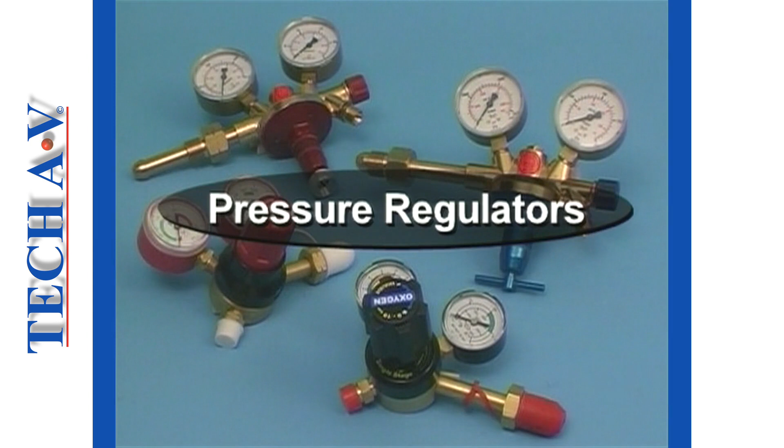The producers of Tech AV Learning Aids welcome you to this series on the subject of portable oxyacetylene downstream equipment. This program deals with the pressure regulators associated with oxyacetylene equipment.

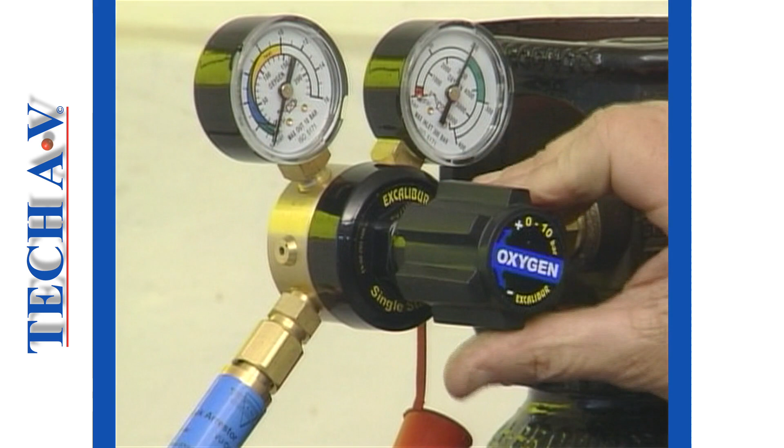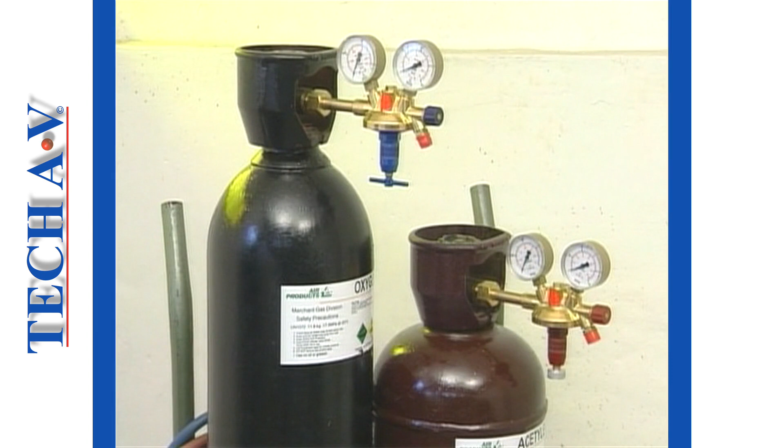Pressure regulators are essential devices in all high-pressure gas applications, and it is highly recommended that, for safety, you use only those regulators equipped with 2 pressure gauges. The primary function of a pressure regulator is to reduce cylinder discharge pressure to a safe, practical, and steady outlet or working pressure.

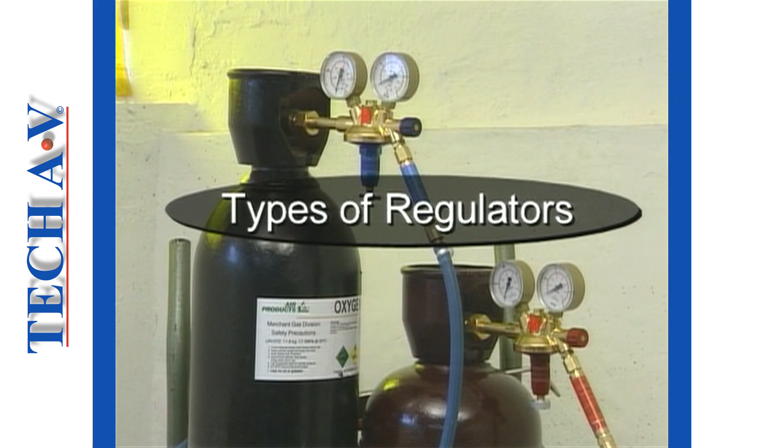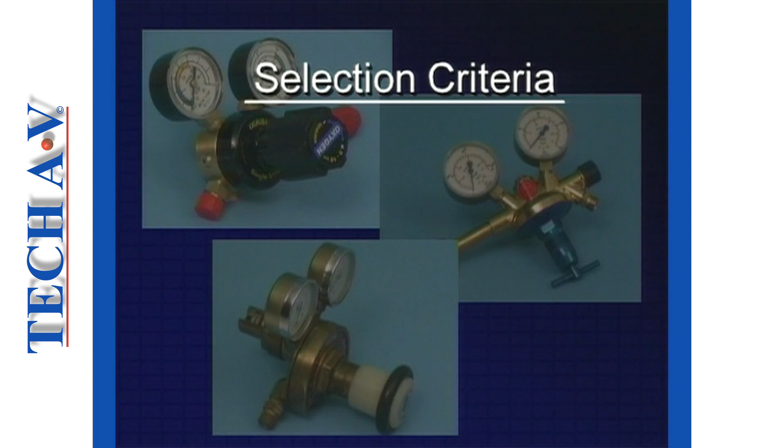There are essentially 3 types of regulator that can be used with oxyacetylene cylinders, namely single-stage, single-stage pressure compensated, and dual or multi-stage regulators. Regardless of which of these 3 types you use, when selecting a regulator, you need to be aware of some important safety considerations. These include manufacturing standards, gas type, cylinder pressure or inlet pressure, and working pressure or outlet pressure.

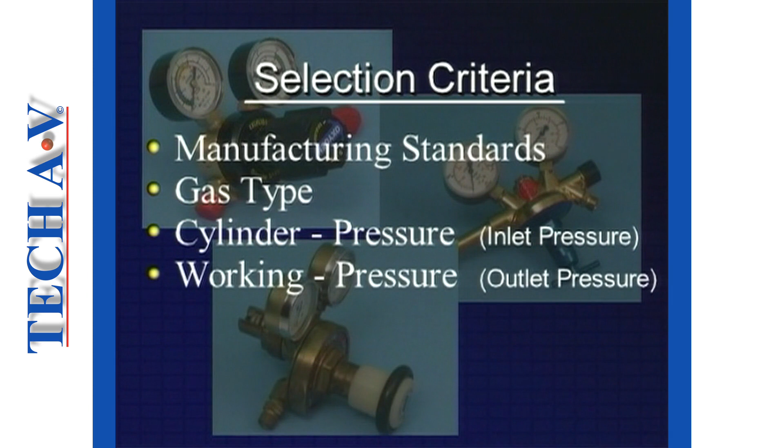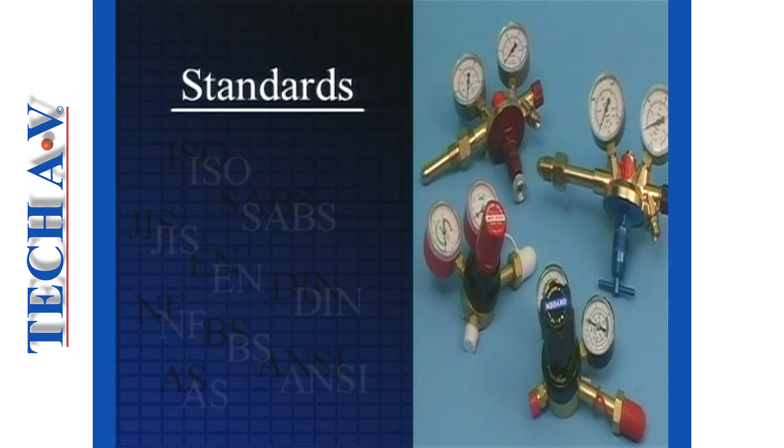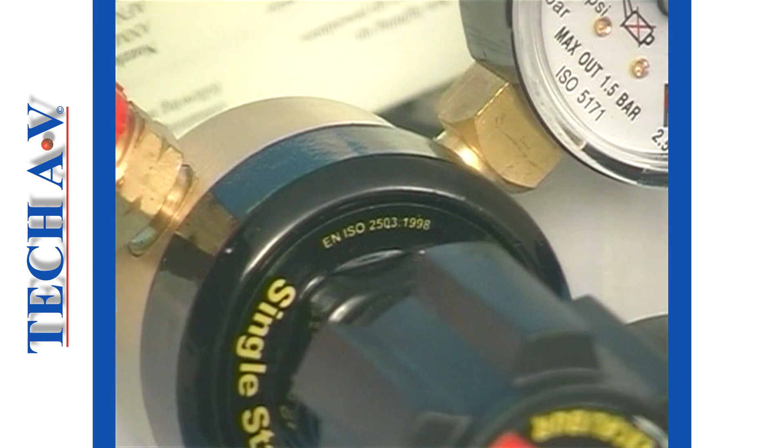The first consideration when selecting a regulator is the manufacturer's standard. Make sure the regulator you use or buy meets ISO 2503 standards or your local equivalent. The ISO 2503 rating will confirm that the device meets with international safety standards of manufacture. You should be able to locate evidence of the manufacturing standard either stamped into the regulator's body, on a specification decal, or in the printed specifications of the regulator.

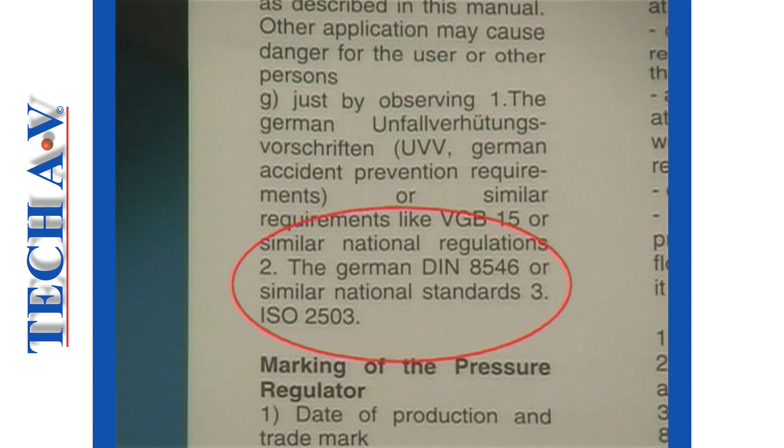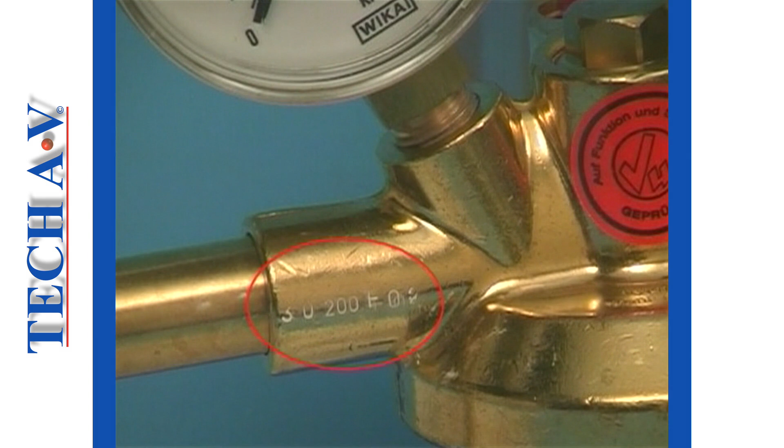One should also consider the date of manufacture or the expiry date, which all leading manufacturers will offer in one form or another. According to most codes of practice, regulators that are designed for use with oxyacetylene and are over 5 years old should be replaced. The next consideration is gas type.

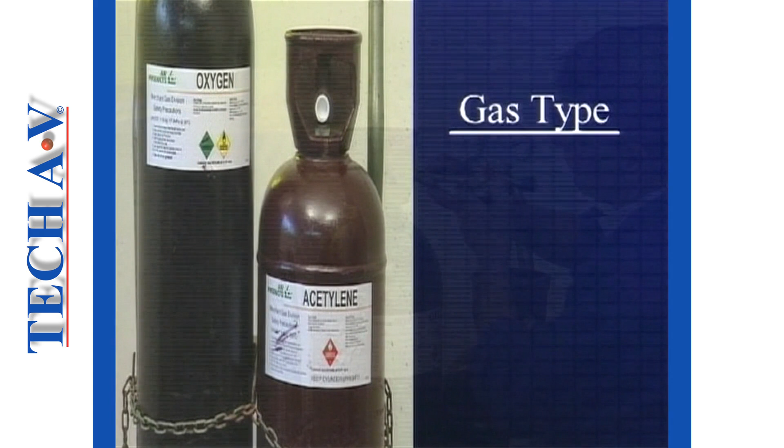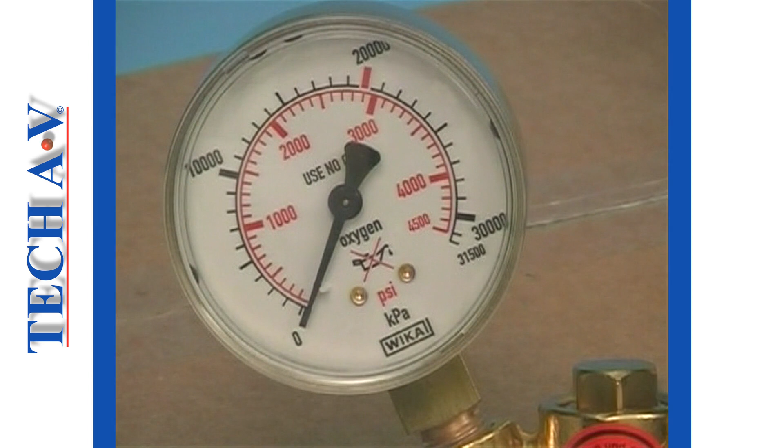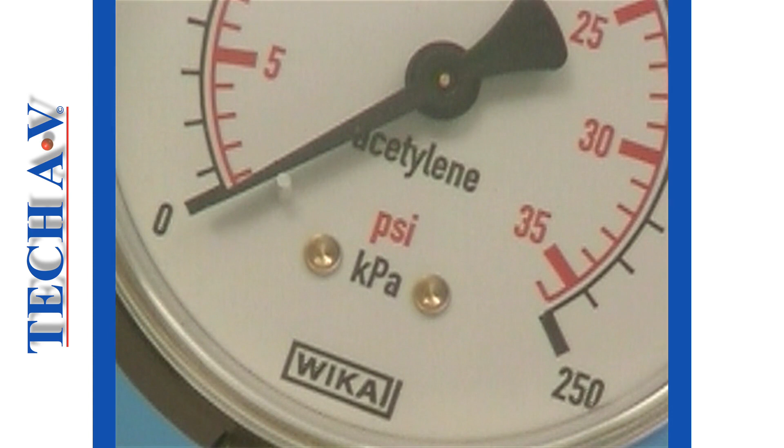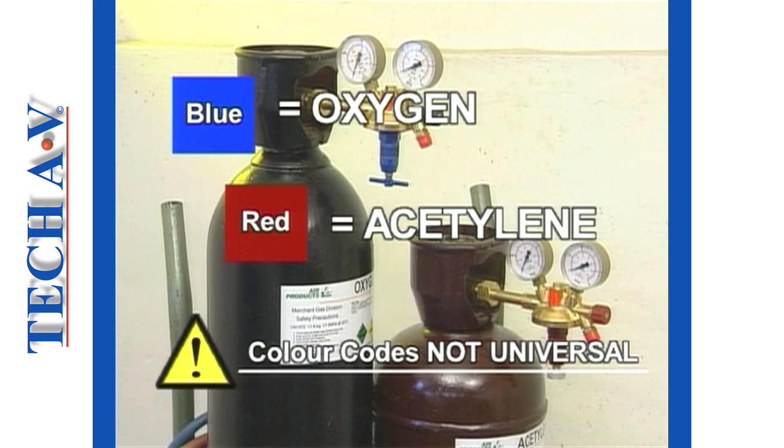An oxygen cylinder must be fitted only with an oxygen regulator. The word oxygen should be clearly displayed on the device and upon the gauges. Likewise, an acetylene cylinder must be fitted only with a regulator that clearly states that it is an acetylene regulator. Although the colors blue for oxygen and red for acetylene are commonly used, one must never rely upon this as positive identification, as color codes are not universal.

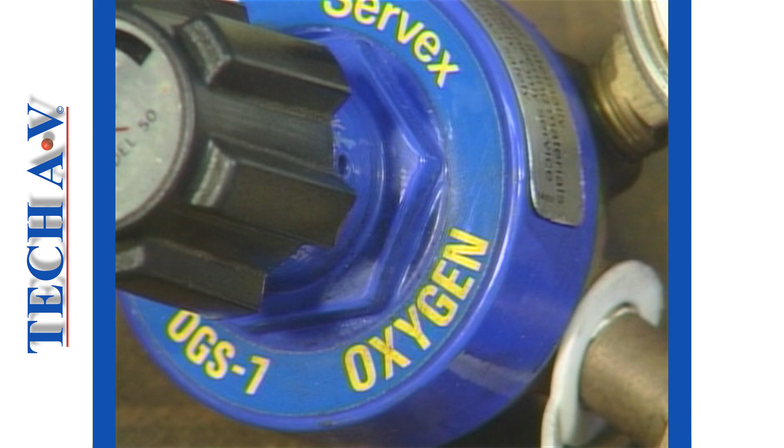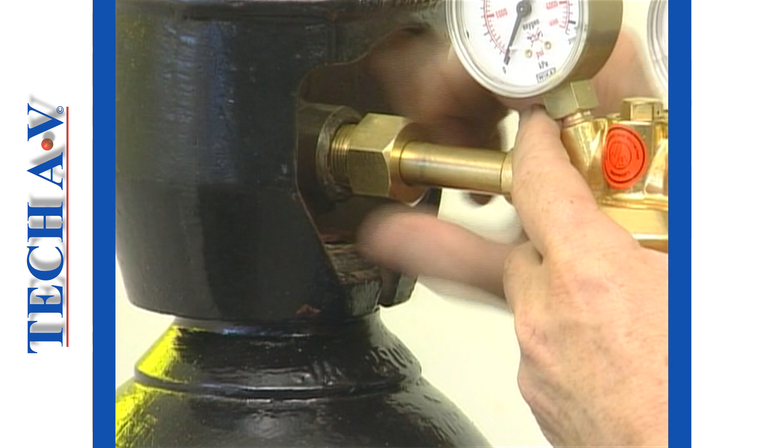Confusion between regulators can be extremely hazardous. Never use or fit a regulator that cannot be positively identified as to the gas type for which it is intended. The next important selection criterion for a suitable regulator is the inlet pressure rating. A regulator which is to be fitted to a portable cylinder must be capable of withstanding the pressure within that cylinder, which obviously will be the inlet pressure entering the regulator.

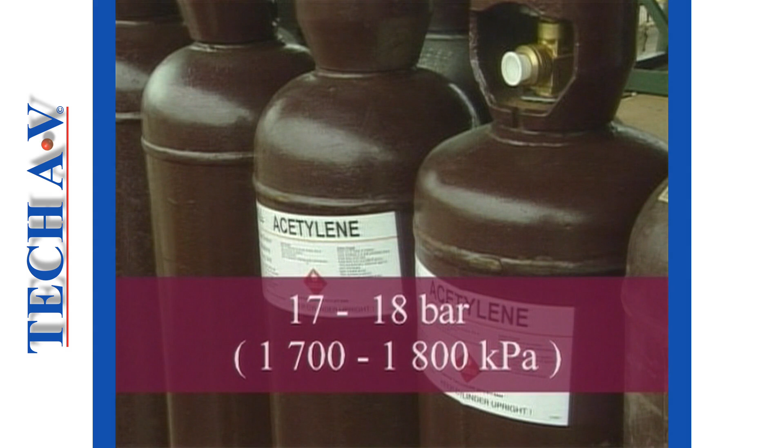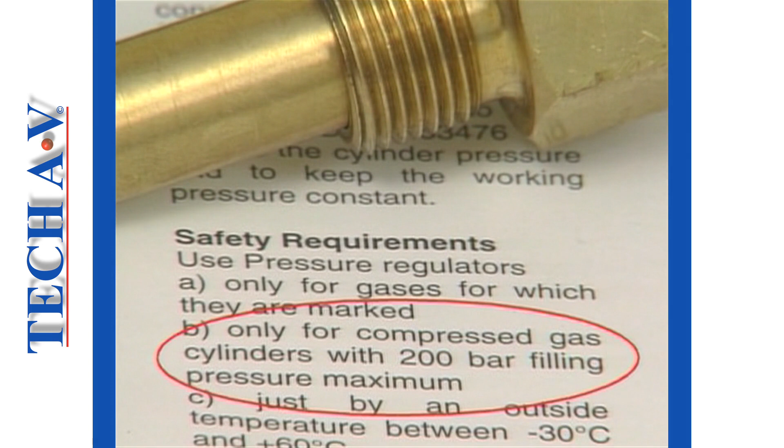In the case of compressed oxygen, cylinder pressure is normally between 170 and 200 bars, although 300 bar cylinders may also be encountered in some regions. Acetylene is packaged at between 17 and 18 bars. The maximum inlet pressure rating for any given regulator will be marked somewhere upon the device or stated within the written specifications of the unit. Never fit a regulator if its stated maximum inlet pressure rating is lower than the cylinder pressure rating.

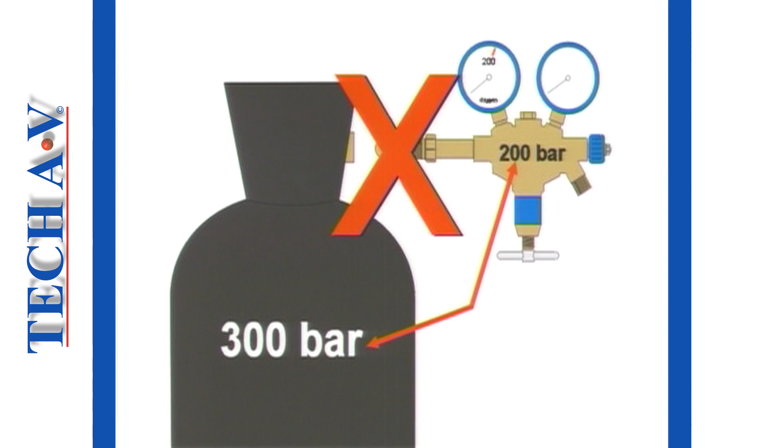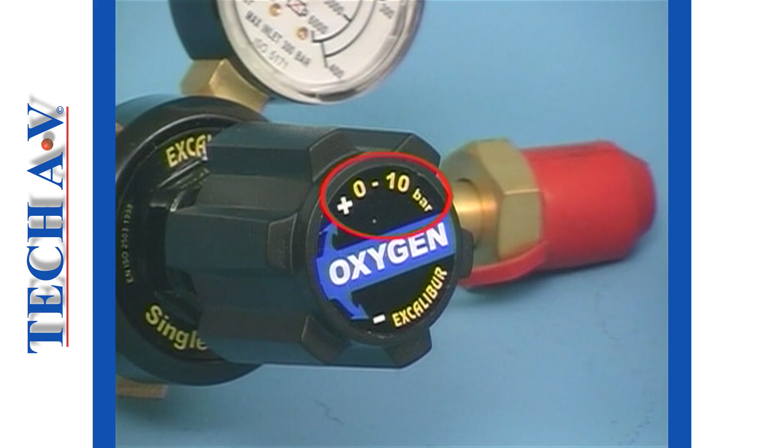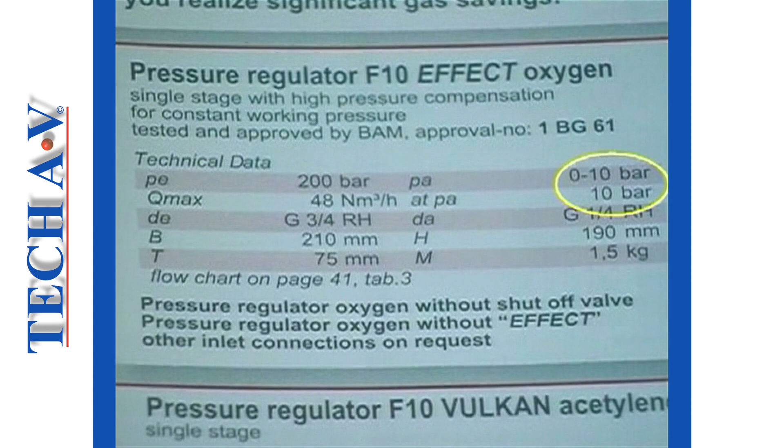The next consideration is the outlet or working pressure range of the regulator. In this example, the figures 0 to 10 on the pressure control knob indicate that this oxygen regulator has a minimum pressure output of 0 bars and a maximum of 10 bars. If the working pressure range cannot be located on the unit, then you will need to consult the manufacturer's specifications for the make and the model in question. For standard oxyacetylene welding and cutting operations, an oxygen regulator with a maximum 10 bar output is considered adequate.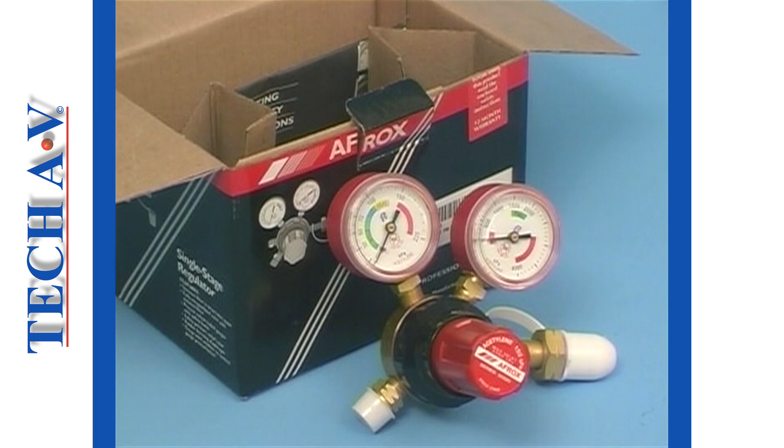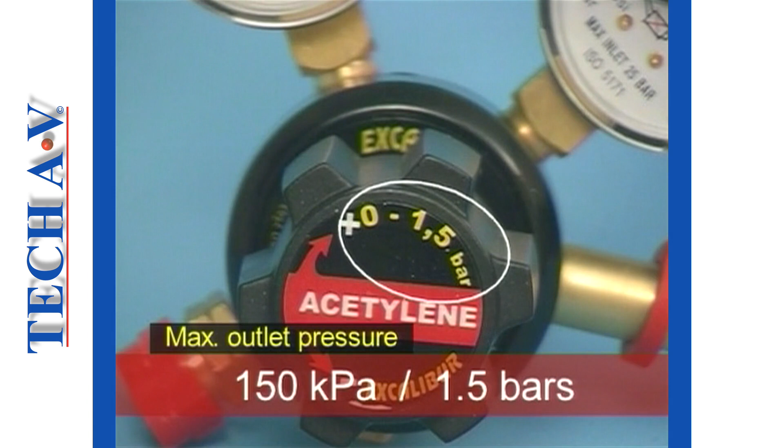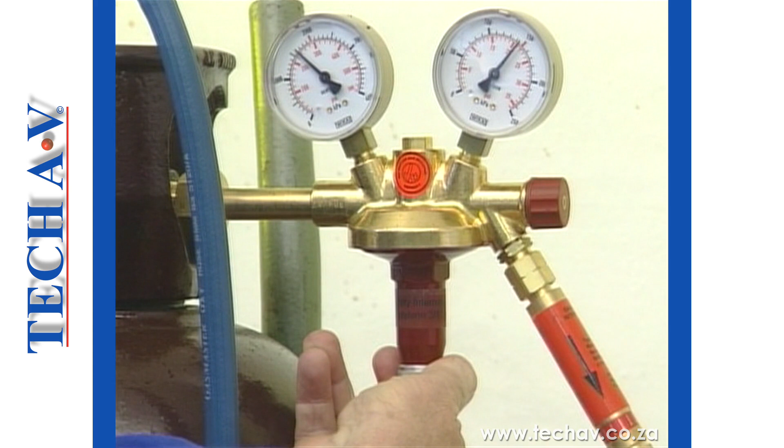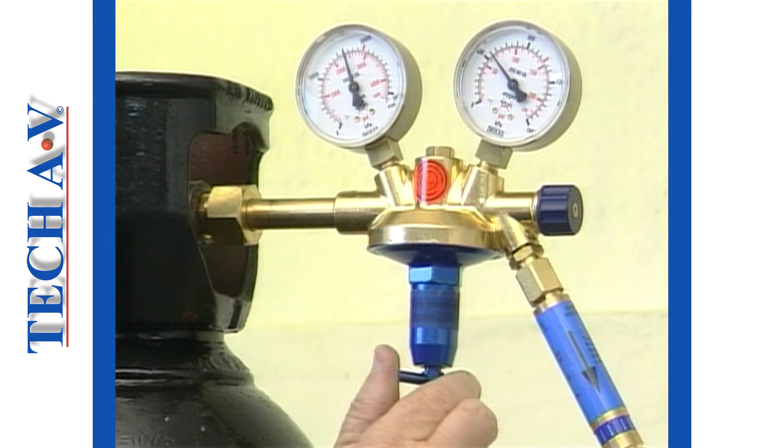In the case of acetylene regulators, these are specifically designed in such a way that they will never exceed a maximum working pressure of 150 kilopascal, that is 1.5 bar. Restricting the working pressure to 1.5 bar is a very definite safety feature of an acetylene regulator, as acetylene, in its gaseous state, becomes highly unstable and extremely dangerous at higher pressures. Even when the pressure adjusting screw is turned all the way in, that is, fully clockwise to its fully open position, no regulator should deliver more than its maximum rated working pressure.